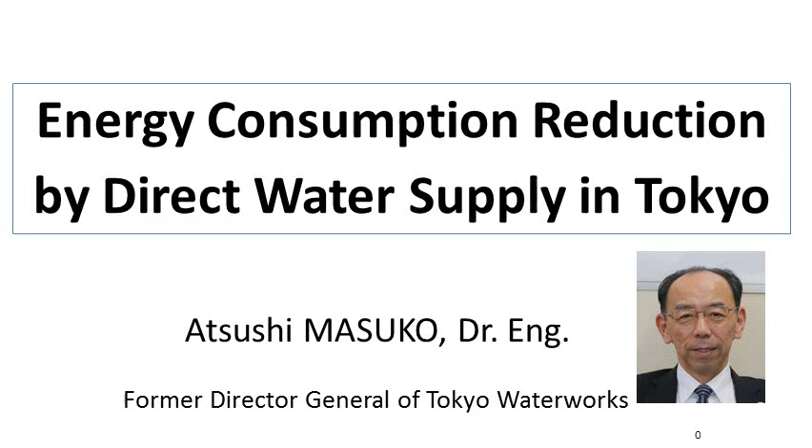In this presentation, I would like to talk about why and how direct water supply is adopted and contributes to reducing power consumption in water supply systems.

Before I get into my talk, I'd like to give you a brief overview of Tokyo water services. Tokyo is a city of 13 million people and is one of the largest cities in the world. The total supply capacity of its facilities is about 7 million cubic meters per day.

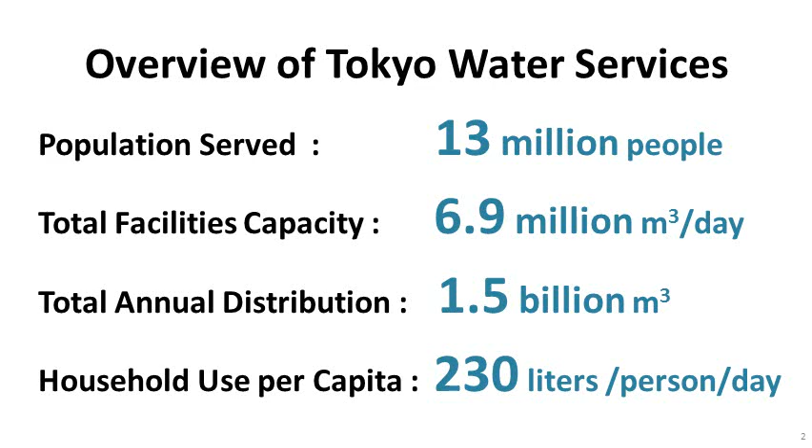It is better to intake water at higher elevations, but only 20% of Tokyo's water is drawn from high elevation intake points. The remaining 80% is from low levels, only a few meters above sea level. Therefore, pressure and water supply stability depend greatly upon pump operations.

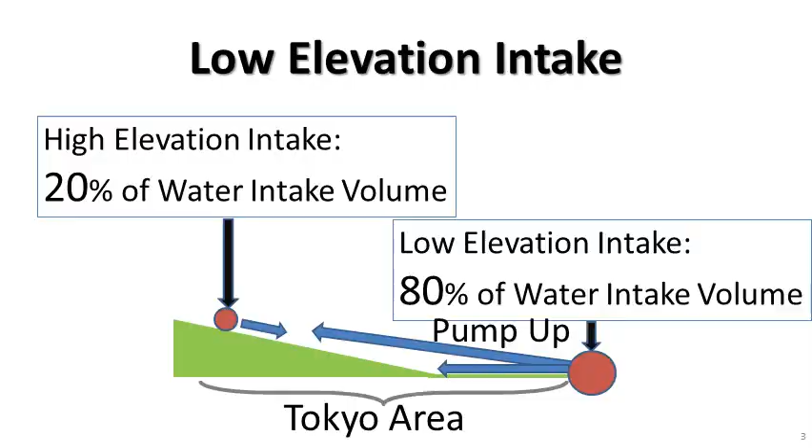One of Tokyo Water's most remarkable points is its ability to achieve both an extremely low non-revenue water rate of 4% and higher supply pressure. Water loss is very closely related to energy loss, resource loss, and money loss. On the other hand, water pressure is essential to maintaining water security in distribution systems and improving customer service. We are striving to reach a balance between the conflicting goals of maintaining higher pressure and leakage reduction.

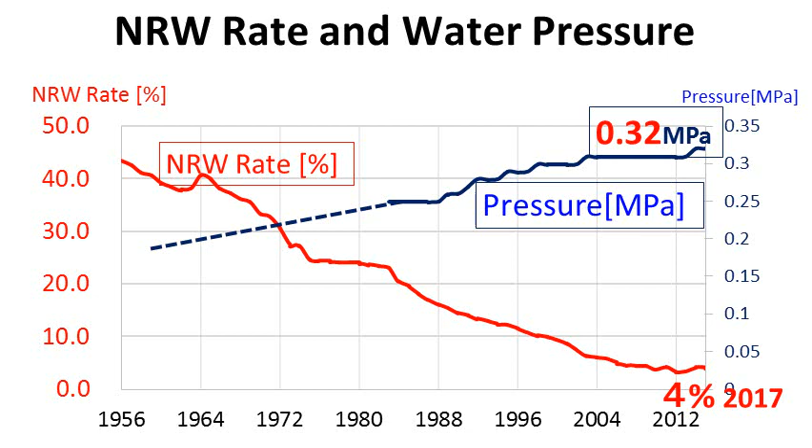Here, I would like to describe the pressure standard in Tokyo. The average water pressure is 0.32 megapascal, and the minimum is 0.2 megapascal. This allows for a direct water supply to every three-story building.

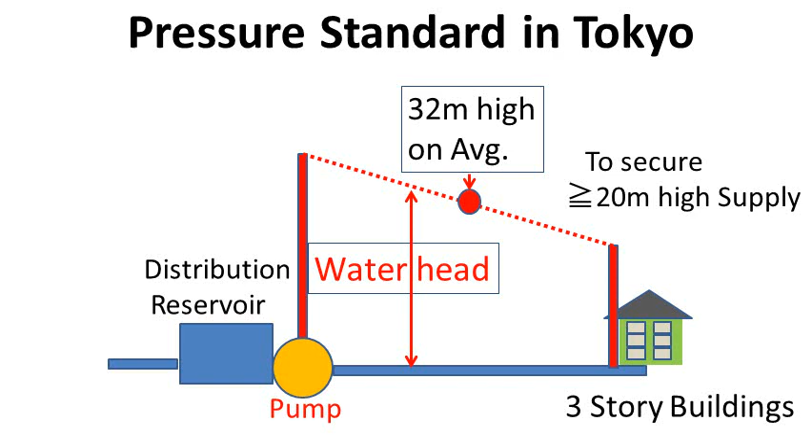Additional pressure standard concepts are as follows. If the pressure is sufficient, buildings taller than 3 stories are supplied directly without using pumps. If the pressure is not sufficient for a building's height, a direct booster pump system is installed.

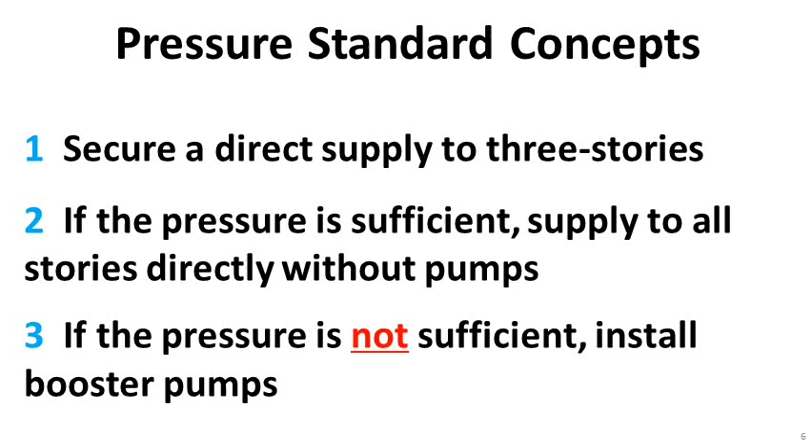Proper distribution requires 0.6 kilowatt-hour per cubic meter in Tokyo. Through my research on receiving reservoir supply, I determined that customers also consume 0.6 kilowatt-hour per cubic meter to lift the water.

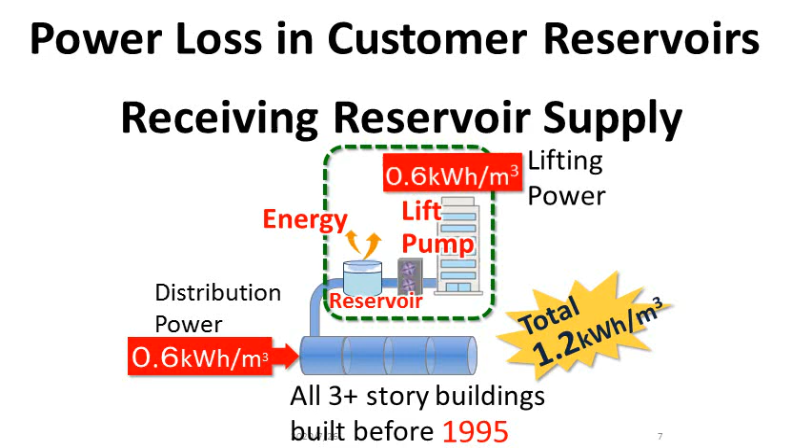Now, shorter buildings 4 or 5 stories tall are permitted to connect directly where pressure is sufficient. Customers do not need receiving reservoirs or lift pumps. Taller buildings must install booster pumps to supplement the pressure. These pumps consume less power than traditional lift pumps from the reservoirs.

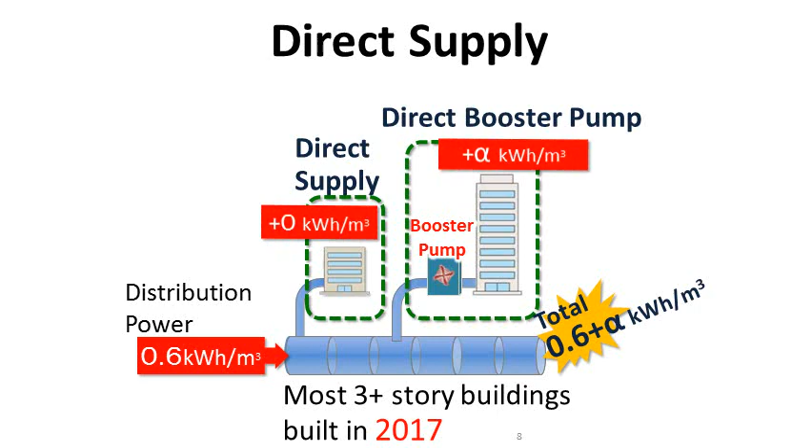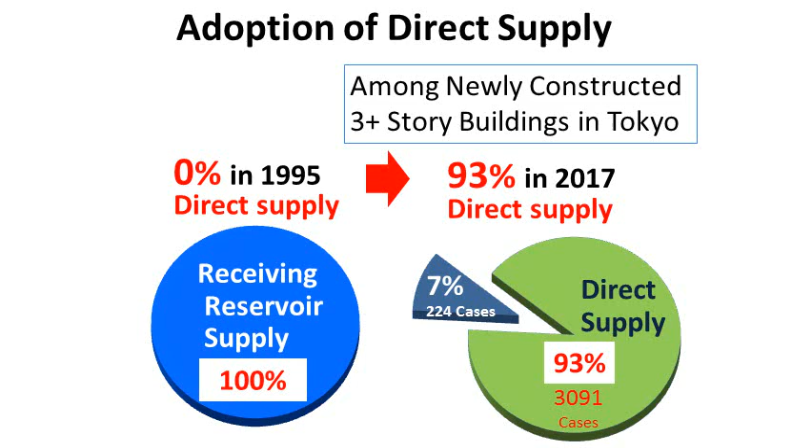The remaining 93% have adopted the direct water supply system, which means 3,000 cases in 2017. Existing buildings have also started to convert their supply systems from reservoir type to direct type.

A major regulation change in 2004 further promoted these conversions. The change was that booster pumps do not need to be installed where pressure in the network is high enough. There are now approximately 3,000 conversions of existing buildings annually.

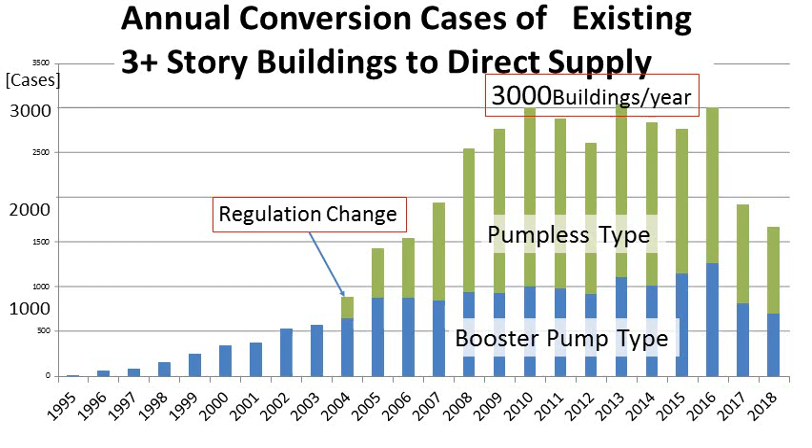Receiving reservoirs were equipped in most buildings 3 stories or taller in 1995. Today, the number of buildings with direct supply or direct booster pump systems is comparable to the number with a receiving reservoir system.

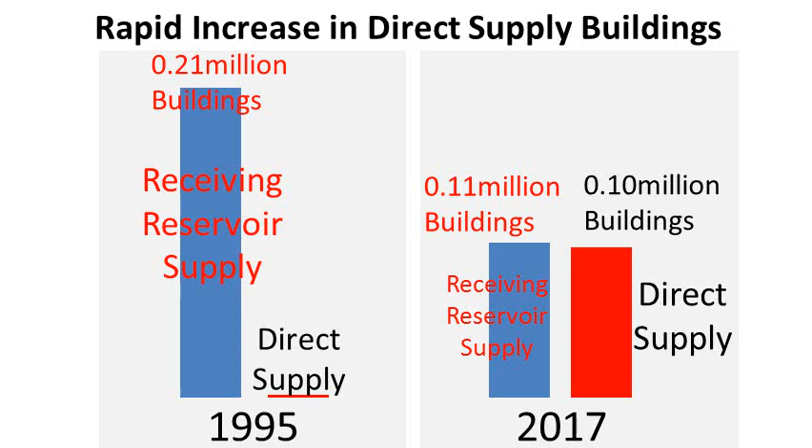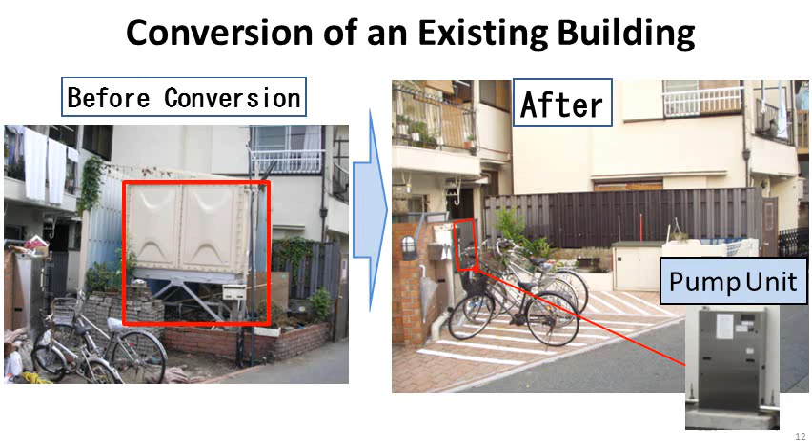Please let me summarize the merits of direct water supply. First, such systems save energy. Second, water is not exposed to the air, so deterioration risk is minimized and quality is preserved. Third, there is no need for receiving reservoir maintenance. This also saves not only energy, but also costs and labor.

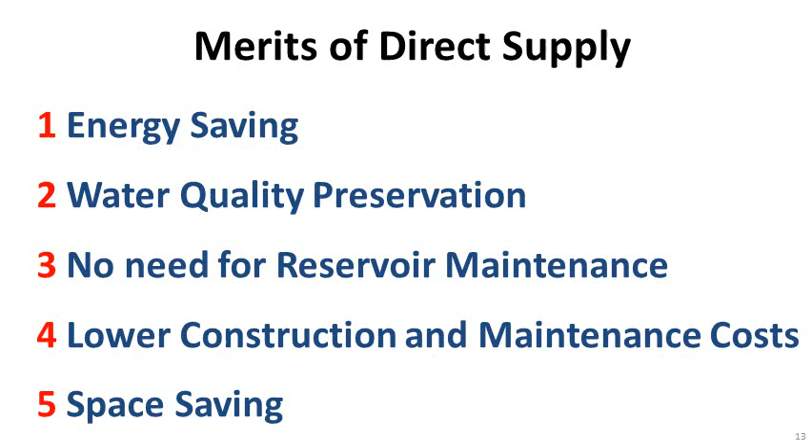Related to this, the initial cost and maintenance cost are much lower. The last merit is related to space in megacities. Conversion means space is created and used more efficiently.

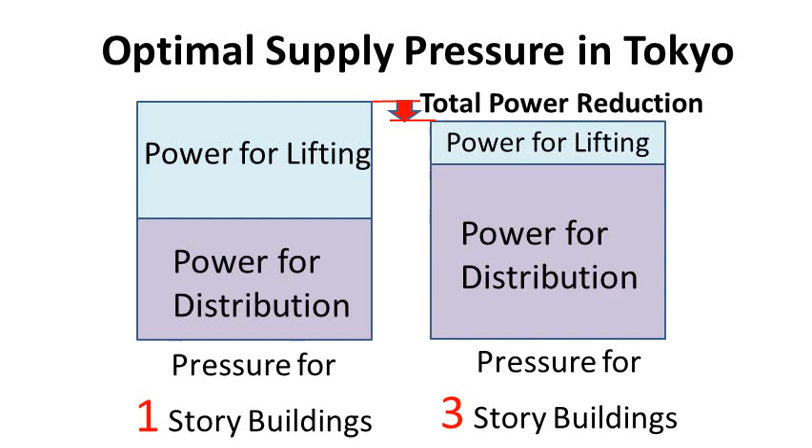Here, I would like to emphasize the importance of uninterrupted water pressure in distribution pipes. Uninterrupted water pressure in pipes enough to block deterioration from outside through leaks or taps is necessary to deliver high quality and safe water to customers.

Moreover, if the pressure is not high enough, water users must intake water with suction pumps. This causes serious pressure drops within the system, and a vicious cycle of low pressure and suction begins.

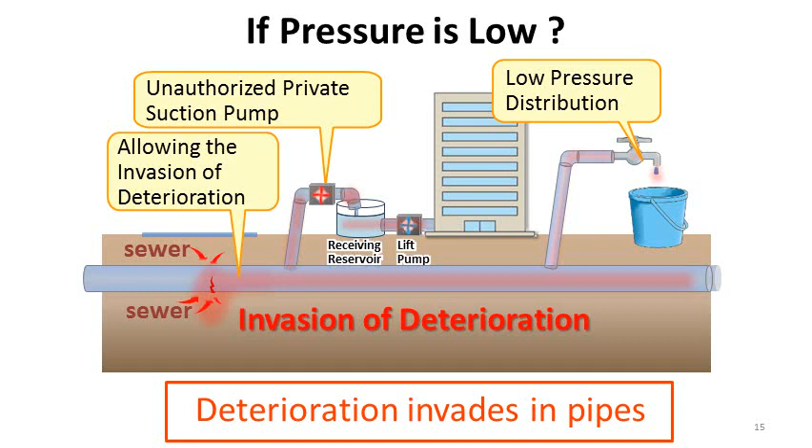With sufficient pressure and supply capacity, water is supplied directly to customers without the need for receiving reservoirs and lift pumps, which waste energy, use up space, and reduce water quality. Those reservoirs may also be at risk of deterioration and even could be subject to attack with poison.

Taller buildings can have direct booster pumps installed and operated safely with proper controls and safe fittings.

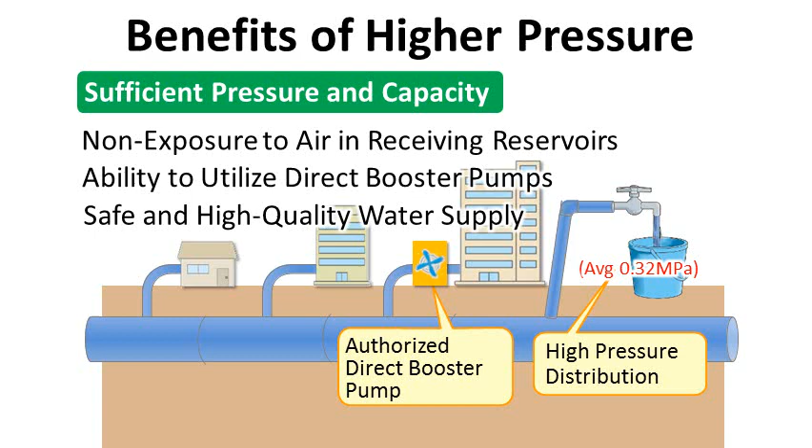Now that we have looked at pressure, let's turn to leakage. Leakage control is a very common issue. It is also one of the most important aspects related to energy loss, resource loss, and money loss. If you reduce leakage by a certain amount, power consumption can be reduced by a comparable amount.